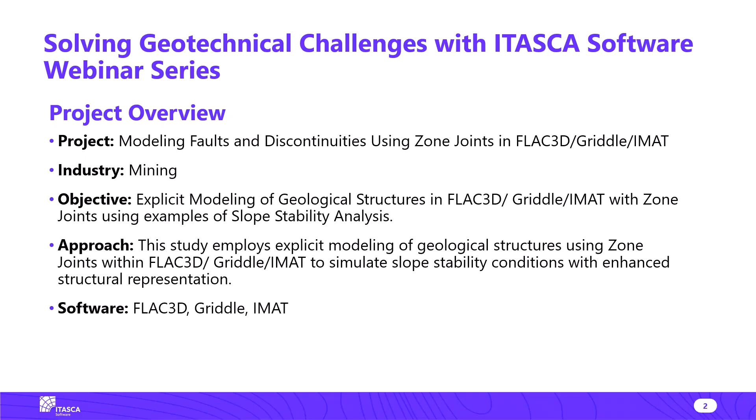The example in this webinar will show how important it is to model faults accurately to get reliable results, especially when analyzing slope failures. Here we show an example using failures that happened at Bingham Canyon Mine in May 2021.

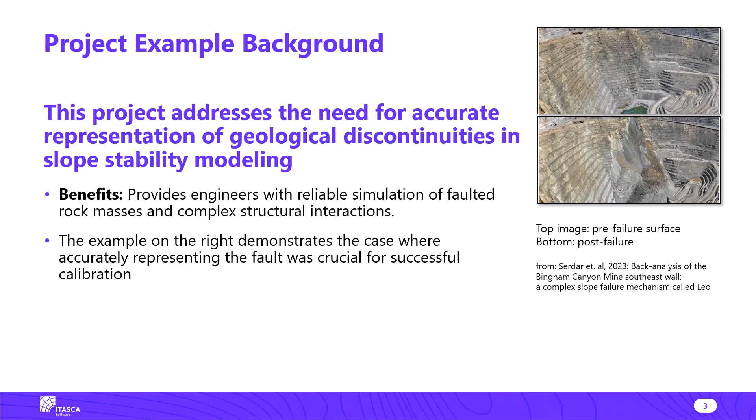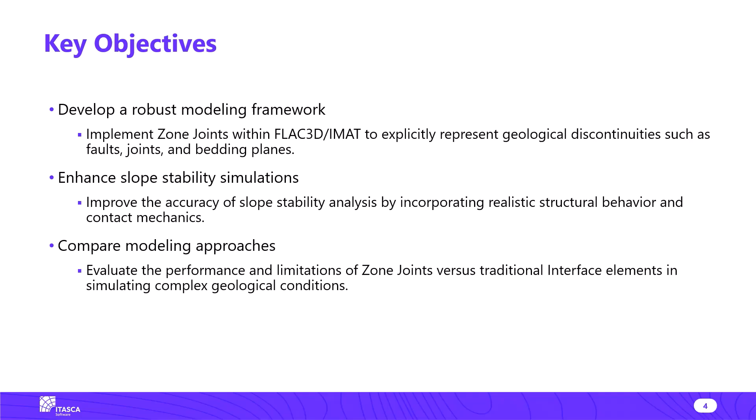We had three main objectives. Build a strong modeling framework within our software, which is FLAC3D and IMAT, to improve performance of slope stability simulations, and to compare zone joints with the interface approach used in earlier versions of FLAC3D, because we wanted to see which one works better for complex geological conditions.

One big challenge we would like to emphasize is modeling faults or bedding planes when they're not straight, when they're bent or intersect each other. It's very tricky, but it's absolutely necessary to get accurate slope stability results.

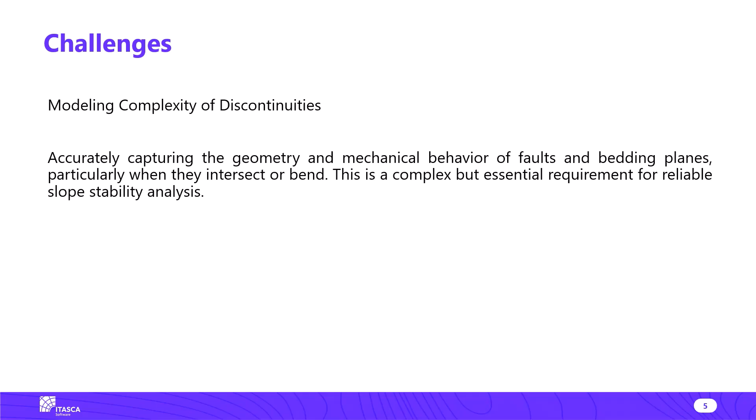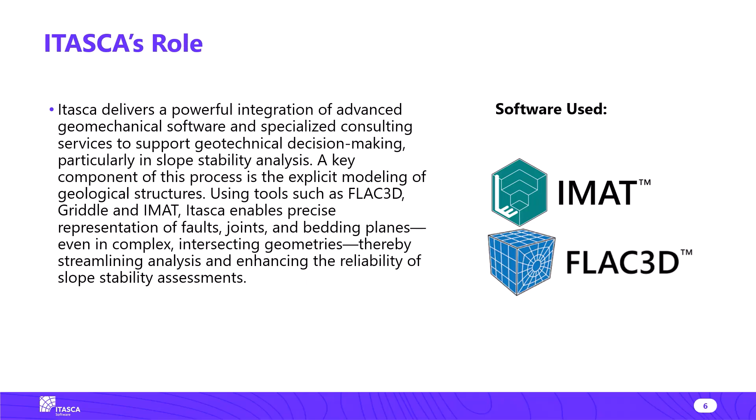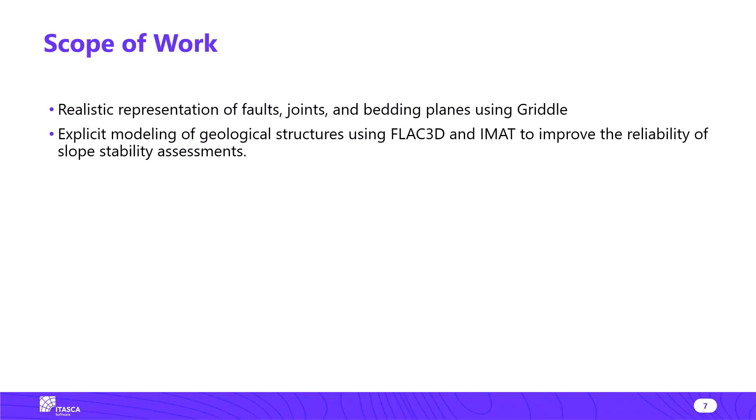ITASCA combines powerful software and also expert consulting to help with geomechanical decisions. Using FLAC3D, Griddle, and IMAT, we can model faults and joints very precisely, even in complex situations. In this work, we use Griddle to represent faults and joints in the mesh realistically. Also, we use FLAC3D and IMAT to model geological structures. This helps to make slope stability assessments more reliable.

FLAC3D creates continuum-based models, but can also include explicit faults and structures using zone joints or interfaces. Zone joints were introduced in FLAC3D version 9 as a new way to model these features. Both zone joints and interfaces use the same linear Coulomb shear strength model to simulate how they fail or slip. Zone joints also allow us to include residual strengths, which helps to model post-peak behavior after faults start to slip. So it helps to capture their behavior more accurately.

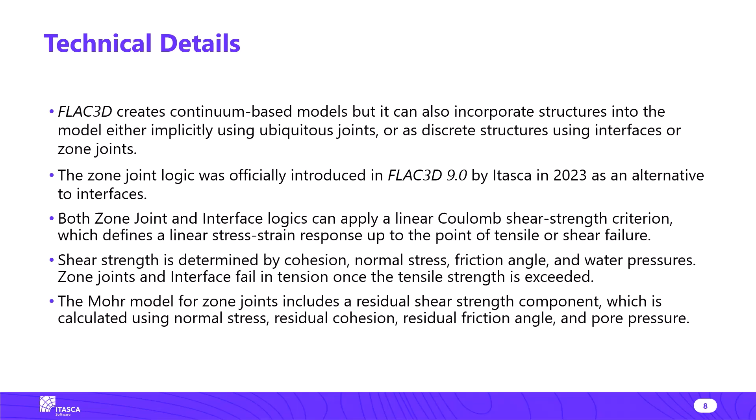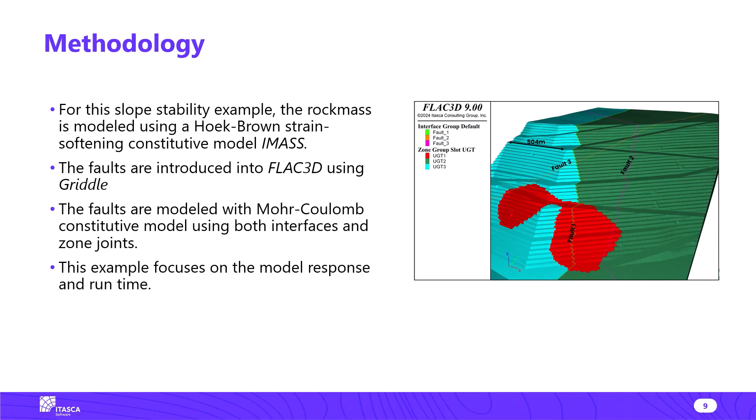Here we show a simplified example. In this simplified example, we are using IMASS to model rock mass, which is based on the Hoek-Brown strain softening constitutive model, and we added faults using Griddle. We tested both interfaces and zone joints to see how the model behaves and how long it takes to run. We use the same approach in both interfaces and zone joints to compare. We got very similar results in terms of response of the model. So we show that you can comfortably switch to zone joints if you used interfaces before.

In this example, we examined the stability of the block. We are showing displacements as we are varying friction of the faults. The friction of all faults was gradually decreased until the block began to slide.

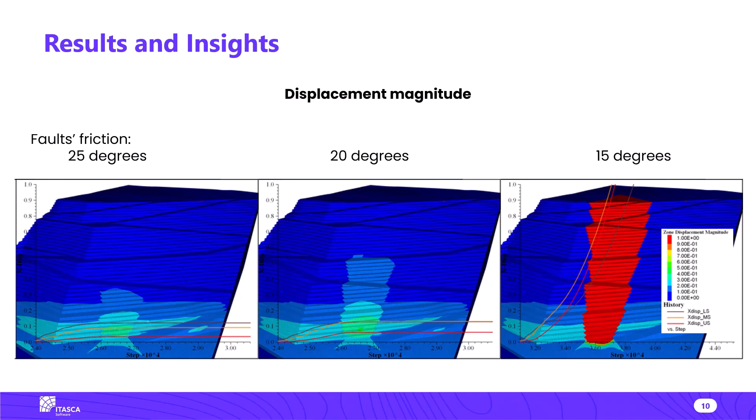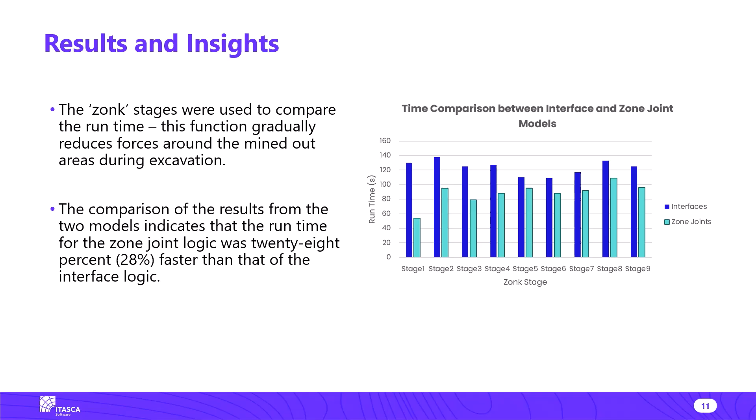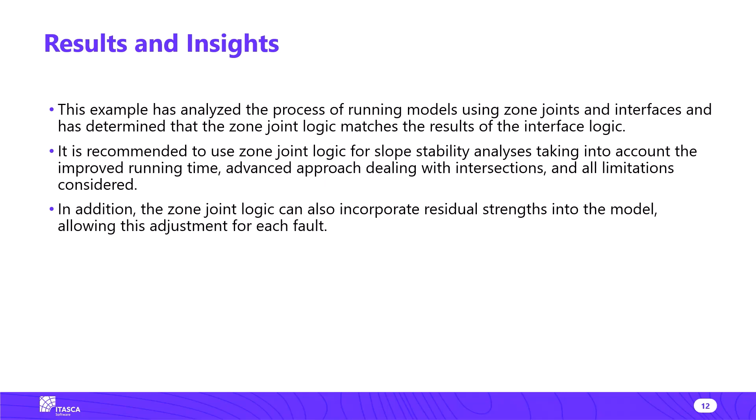We also compared how long each model took to run. The zone joint model was 28% faster than the interface model, which is a big improvement. Through various projects and examples, we showed that zone joints give very similar results as interfaces, but they run faster and handle complex fault intersections much better. Also, zone joint logic can incorporate residual strength, which was also very important for some of our projects.

In May 2021, a slope failure, which is known as Leo failure, happened at Rio Tinto Bingham Canyon mine. Thanks to early detection from monitoring systems, the team was able to safely evacuate people and equipment. ITASCA was brought in to analyze the failure and to understand what caused this failure. The goal was to learn from it and to help to identify and prevent similar issues as mining continues. The results gave a very clear picture of how the rock mass behaved and what caused the failure. This helped to support risk management and guide decisions for future mine expansions.

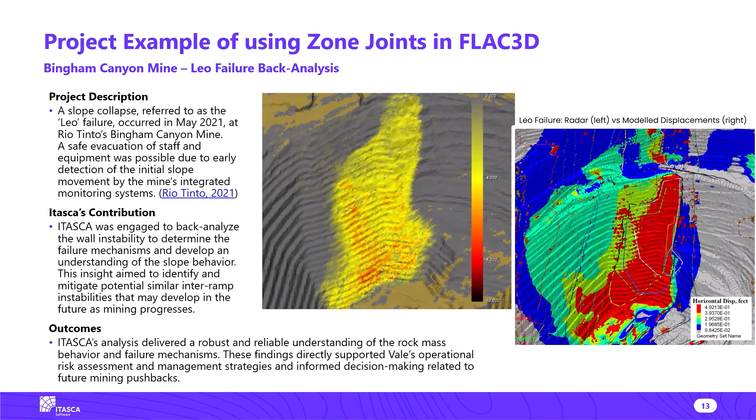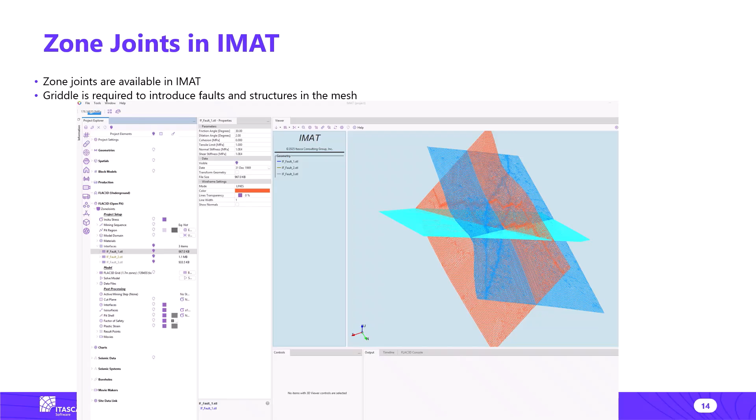Zone joints are available in IMAT as well. Griddle is required to introduce faults and structures in the mesh. Then the mesh can be imported in IMAT and properties can be assigned to introduce structures and faults.

This is Jim Hazzard. I will now dig into the details of how to model faults and discontinuities in FLAC3D and IMAT. So it is certainly possible to model discontinuities in FLAC3D, even though you may think of FLAC3D as a continuum modeling program. It is possible to model discontinuities, and there are different ways that we do that.

So Tatiana touched on this already, but I'll just elaborate a little bit more. There's really two main ways of doing this. Number one is using the ubiquitous joint constitutive model. So you can see here on the left, I have a little conceptual picture of what that might look like. Imagine you have a set of parallel, closely spaced joints. You don't necessarily want to put all of those joints in your model as actual discontinuities. You can assign the ubiquitous joint constitutive model, and the continuum will then behave as if there were a set of parallel joints in there. You specify an orientation and a strength for those joints. And again, the continuum will behave as if the joints were there, but we're not actually putting discontinuities in there.

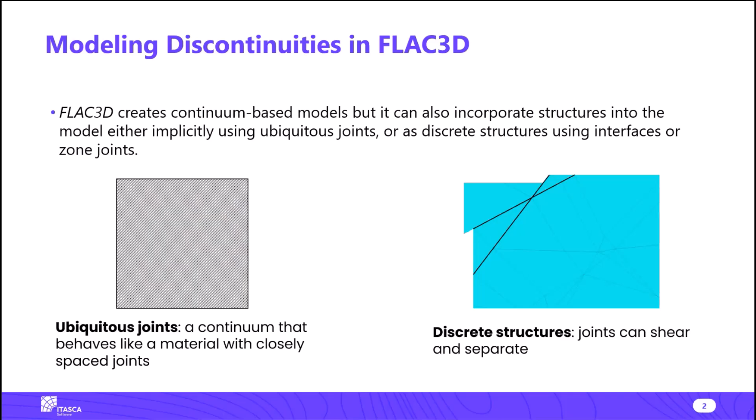If the movement, for example, separation and shearing on actual discontinuities is important, then you probably want to explicitly put specific discontinuities in the model, especially if you have major faults or other things that have been mapped, and the behavior of those things is important, then it is possible and advisable to put them in as discrete structures within the model.

Now, Tatiana talked a little bit about interfaces and zone joints. So these are two very similar things, but there are some subtle differences here. Before FLAC3D version 9, we only had the ability to put in what we call interfaces. These are true discontinuities. So the way that it works is that you identify the faces where you want to have a fault or a joint. You do a separation, right? So you're duplicating the grid points. And this allows there to be movement between the two sides, right? Opening and potentially shearing. But the way that the interfaces work is that they're really one-sided.

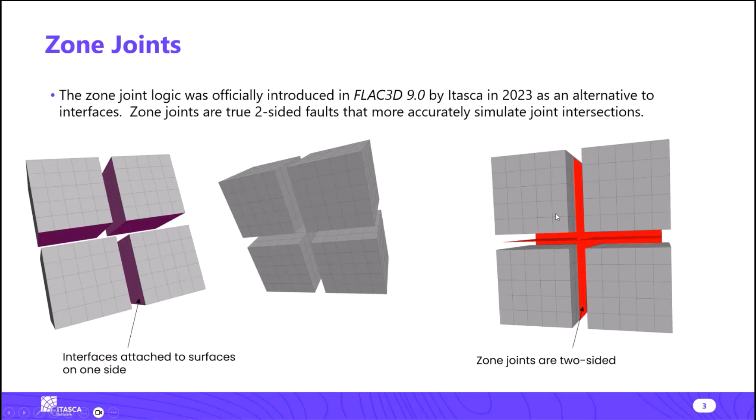Post version 9, we have a new technology which we call zone joints. And what this is, it's a true two-sided discontinuity. So again, you identify the faces where you want slip to occur or separation. You can do a separation, you're duplicating the grid points, same as before. But now what we have is a two-sided joint, so we don't have to identify which side the interface is on. Both sides will interact with each other when they come into contact, and you get a slightly more realistic behavior. And it also makes the joint intersection behaviors and calculations much more accurate. So post version 9, I would say probably more people are using this zone joint technology and moving away from this older interface technology.

Either way, if you're using zone joints or interfaces, or in fact, ubiquitous joints, we assume a Coulomb shear strength criterion. So this is probably familiar to you. The shear strength is dictated by a user-specified cohesion, a user-specified friction angle, and then the normal stress and potentially water pressure.

So if you plot, for example, shear stress versus shear displacement, you will see a linear behavior as the shear stress increases according to some user-defined stiffness. Then you reach the shear strength, which is the cohesion plus the normal stress times the tangent of the friction angle, and then this thing will start to slide, right?

It is possible to specify a residual cohesion and a residual friction angle, which is different from the peak. And then what that means is that once sliding starts, the joint actually weakens. Okay, so the strength decreases instantaneously, and you will see a new strength, and it will continue to displace in shear at a constant shear stress, and it will just happily slide along there.

If I plot instead shear strength versus normal stress, you can see the typical Mohr-Coulomb curve that you're all used to seeing, where at zero normal stress, you have a strength that's determined by the cohesion, and then the strength increases according to the friction angle.

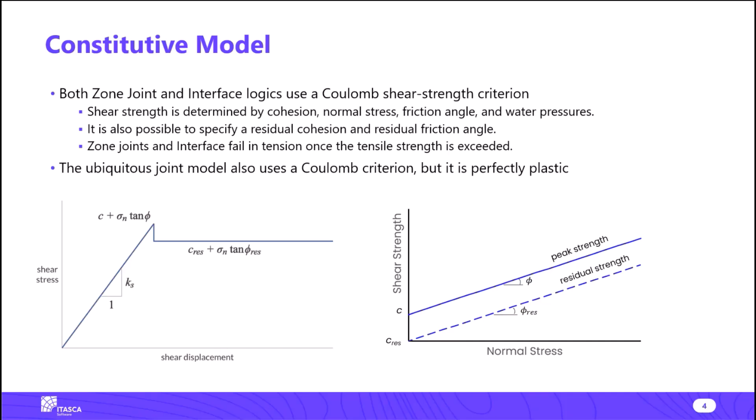Okay, so how do you put the discontinuities into FLAC3D? For ubiquitous joints, it's easy. You just specify an orientation and a strength, a cohesion and a friction, and you just assign that to zones. You don't need to worry about changing the geometries around or anything like that. You just identify a region that's full of ubiquitous joints, and you assign the necessary properties, and it will behave as if there were a parallel joint set there.

For the zone joints or the interfaces, it's a little bit more complicated because you need to identify where these discrete features actually are. And so the way it works is you need to identify a set of zone faces, and then you can do a separation operation where the faces are separated and the grid points are duplicated. And again, this allows there to be relative movement between the two sides.

For complicated geometries, if you have a bunch of intersecting faults, maybe like in this example here, you will almost certainly need to use Griddle or some other similar software to generate the geometries such that the faces line up with the actual mapped discontinuities.

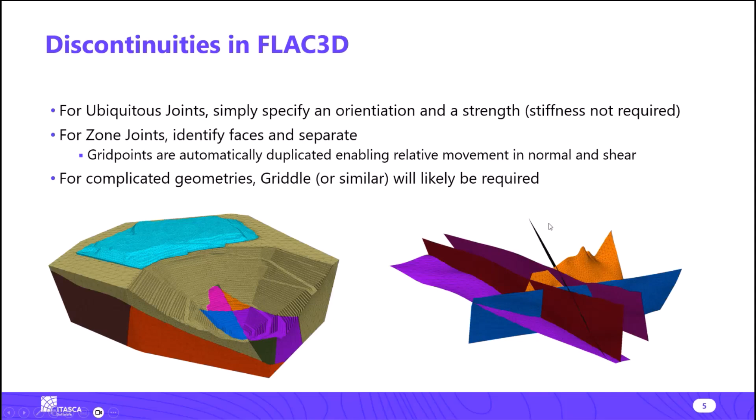It is also possible to simulate discontinuities in IMAT. Again, you could use the ubiquitous joint model. There's no built-in way to actually create true interfaces. Again, you could potentially use Griddle, and I'll show that on the next slide. But one thing you can do within IMAT without leaving the program is create these weak zones.

So as you may or may not know, IMAT builds the models using an octree system. And what this means is that the whole model is composed of little cubes, and you have small cubes in the region of interest, and you have bigger cubes away from the region of interest. And so you can see here, for example, we have an open pit. It does a pretty good job of matching the geometry of this open pit, but it's not perfect. It's not an exact match.

And so for modeling a discontinuity or a fault, it's not that easy to have an exact match to the surface of this fault. So what we can do instead is just find all of the zones that are maybe touching this fault or within some distance of the fault and give them a set of weak properties, right? So instead of modeling a true discontinuity, we're just modeling a weak zone here. In some cases, that's great. In some cases, maybe that's not great.

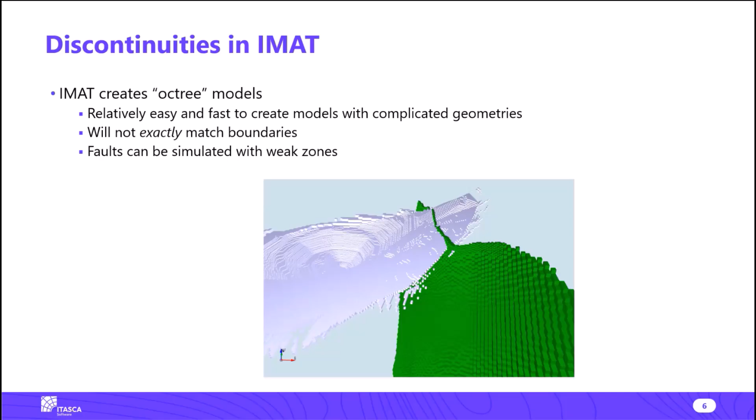If modeling the actual discontinuity itself is important, it's still possible to do this within IMAT, but you just need to generate the geometry first with Griddle. So if you generate the geometry and you have identified faces that line up with certain faults or joints, you can import that into IMAT, and then everything becomes relatively easy, right? You can choose the faults, and then you can assign properties to them using the IMAT interface.

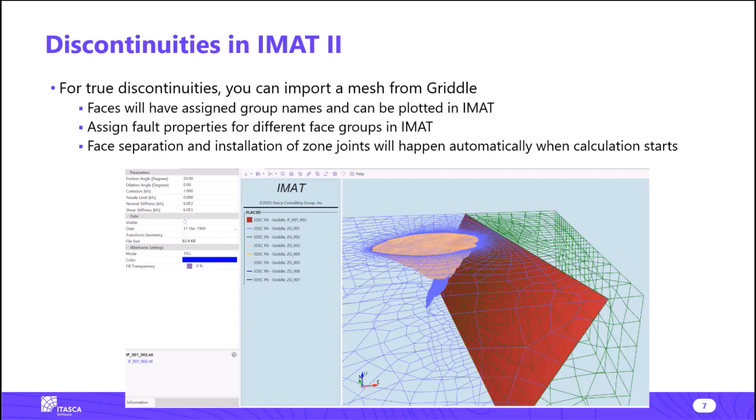So here I've got a model with just one fault in it, and I can specify friction angle and cohesion and tension limit and so on. Once I've set up my model and properties and so on, I hit run, and the operation of separating and duplicating grid points and assigning properties and all that stuff just happens automatically. And then when it's done calculating, I'm back in IMAT, and I can look at the results within IMAT.

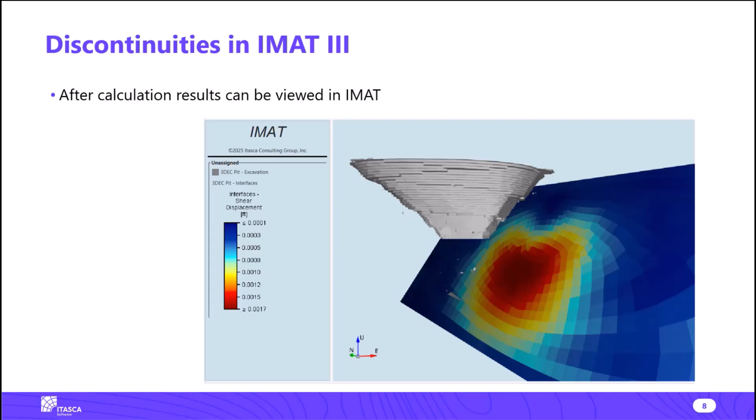So here's the same example. Now I'm just looking at the shear displacement on the fault. Of course, there are other things I can do here, cut planes and isosurfaces and so on. This is just showing you how it's possible to look at results on these discontinuities within IMAT.

So that's basically it. To summarize, if you want to model discontinuities in FLAC3D or IMAT, you can use the ubiquitous joint model. You can use interfaces or zone joints. These are very similar. You could also just make a band of weak zones, and that's relatively easy as well. Whichever method you use, we will be assuming a Coulomb shear strength criterion where you specify a cohesion and a friction and possibly a tension strength.

If you have relatively simple geometry, like something bedded, maybe a coal mine, it would be possible to just build this in FLAC3D and identify the faces that form the beds and do the separation and so on. If you have more complicated geometries with intersecting faults, most hard rock mines, you would need to create the geometry in Griddle or similar, and then import that into FLAC3D or IMAT.